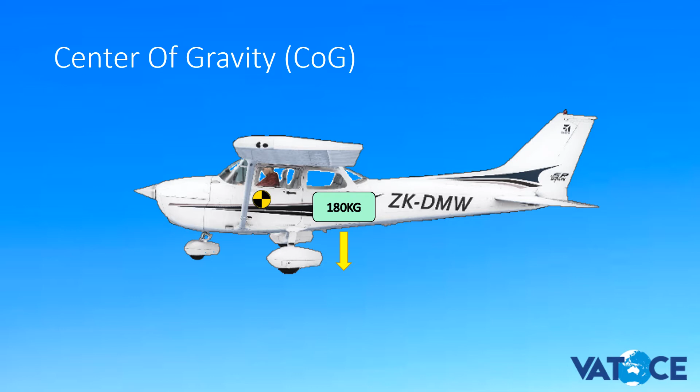So if we're looking now at the center of gravity's effect on the aircraft's stability, we'll see that if we bring up our center of gravity again in the same location, slightly towards the front. Remembering that weight acts through the center of gravity, the whole weight of the aircraft will act through the center of gravity while it's in flight.

Now, we've shown weight, but what we also need to consider is where the lift force is acting. In this case, we'll assume that the lifting force is as where this arrow is showing right now. CL stands for the coefficient of lift, or the center of lift. So this is where the lifting force is acting on the wing and on the aircraft.

Now, if we're looking at this example, basically if you picture the aircraft in flight, it is hanging off the center of lift. The center of lift is what's pulling the aircraft up in the air. So if you can imagine that there's a string connecting through the center of lift to the wing, and you're holding the aircraft and dangling off that string.

Now if you have a look at the center of gravity, you can see that it is forward of this center of lift. So the result of this will mean that because all the weight is acting through the center of gravity, and there's a bit of distance between the center of lift and the weight, the aircraft will tend to nose down, as you can see here.

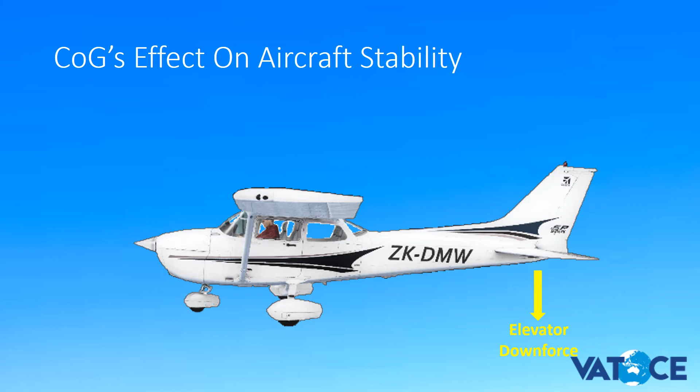Here's our center of gravity now, slightly aft. What would cause the aircraft to have the center of gravity in this position would be potentially some people in the back, or maybe the tanks are full of fuel, and this will cause the center of gravity to move aft.

Now, because weight acts through the center of gravity, roundabout with the center of gravity as it is, it's going to act about the same position as the center of lift in this case. So imagine the center of lift is a string holding the aircraft up, and the weight is acting down through the center of gravity.

Now if the center of lift is a string and you're dangling the aircraft in the air, you'll notice the aircraft will just stay level. It's not going to pitch down, it's not going to pitch up. It'll just stay in the position it's in.

Now, this aircraft is partially stable, but it's not as stable as it was when the center of gravity was ahead of the center of lift. The reason is that when the aircraft comes to stall, it's not going to be as readily wanting to pitch the nose down.

This means we're going to have to generate some downforce on the nose, or some upforce on the back of the plane, to bring the nose down to recover from the stall. Now, in a stall, because the airspeed is very low and the elevator at the back of the plane loses its effectiveness at this lower airspeed, it's going to be a lot harder to bring the nose down. This means it will inherently take longer to recover from the stall, which isn't a good situation, especially if the aircraft is low to the ground, where you really want to recover in as little altitude as you can.

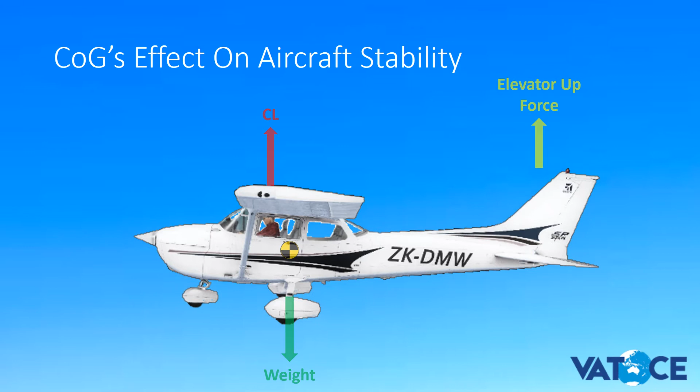When the aircraft stalls, because the elevator loses effectiveness at this lower airspeed, the nose will come up as the aircraft stalls. Now, because we need a nose down attitude to gain airspeed to recover from a stall, with the center of gravity aft of the center of lift, the aircraft is not going to want to nose down.

It's wanting to stay with the nose up because remember that string attached to the center of lift on the wing, and the center of gravity is aft of the center of lift. The aircraft wants to nose up, and because of that really low airspeed in the stall, and the elevator has lost a lot of its effectiveness, it's going to be very hard, if not near impossible, to lower the nose of the aircraft. This will result in the aircraft pancaking into the ground or even entering a flat spin, which is not a good idea at all and is a very dangerous situation.

So from these you can see that the trade-off for stability is speed, and basically you really want to have your center of gravity ahead of your center of lift if at all possible. Otherwise you're endangering the flight and potentially risk crashing the aircraft.

So it really depends. If you're wanting to get more speed but the aircraft being less stable, then it's not a good idea. I mean, depending on the aircraft type, say in the Cessna 172, you may get an extra 10 knots on top of the cruising speed when the center of gravity is further aft.

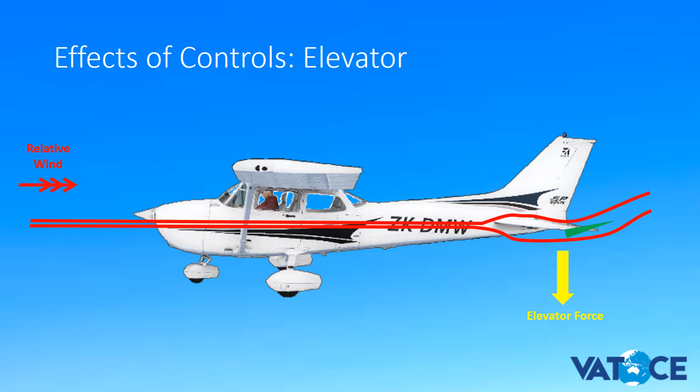Alright, let's move on to the ailerons now. Ailerons are located on the ends of the wing, and what they're used for is to bank the aircraft, or roll the aircraft.

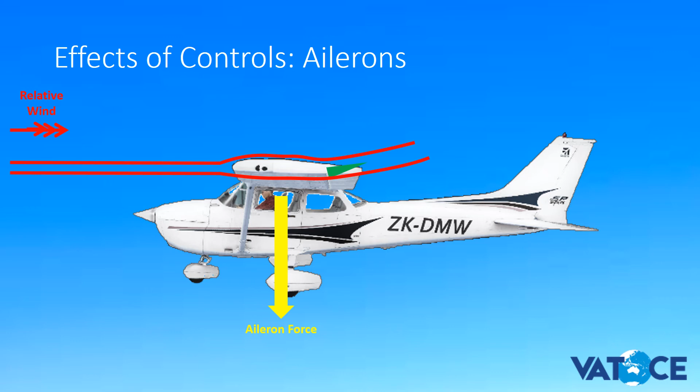This is kind of a weird angle to look at this demonstration from, so I'll show you another angle in a second. Hopefully it makes sense that because the aileron is coming up, it's reducing the amount of lift on that left-hand wing, basically making the wing go down. Let's change to the other angle and show you how this works.

Looking at the back of the plane, we've got our two components of lift on each wing, representing the lifting force on each wing. If we move the control column to the left, you'll notice the left aileron comes up and the right aileron goes down, as you can see here. The left aileron deflects air upwards, while the right aileron deflects air downwards.

As I said before, the aileron on the left wing, as it comes up, deflects air upwards, which decreases the lifting force on the left-hand wing. However, because the aileron on the right-hand wing deflects air downwards, it adds to the lifting force on the right wing, so the lifting force on the right wing will increase.

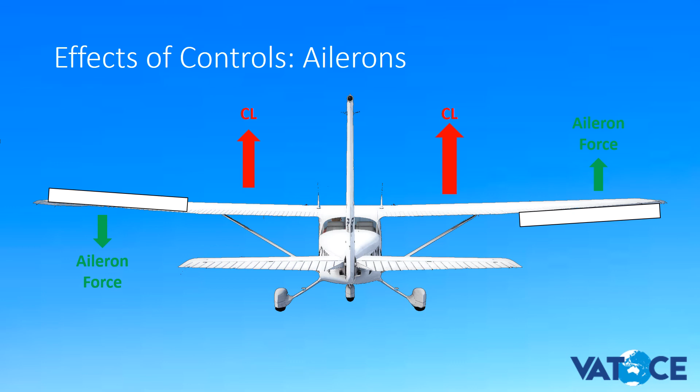So you've got the aileron force, as you can see there. If you add the aileron forces to the components of lift, you'll observe that on the left wing the component of lift will decrease, and on the right wing it will increase. As a result, the right wing wants to climb while the left wing wants to descend, and this causes a rolling effect to the left. You'll note that the aircraft will roll left. This is the basic fundamental of how ailerons work.

The same applies if the aircraft was to turn right: you would move the control column to the right, the ailerons on the right wing would come up, and the ailerons on the left wing would go down. Secondary effects of the aileron include not just the aircraft rolling, but when rolling the aircraft, we also get a secondary effect called yaw.

I'll explain yaw in the next slide, but when the aircraft banks, it skids into the turn. I can't really show this in this diagram, so just bear with me and try to imagine what I'm explaining. The aircraft will roll left, and as it rolls left, it kind of skids left and skids into the turn.

Let me get my pen out. So the aircraft is going to skid this way as it goes into the turn. Now what this is going to cause is the aircraft's nose to, well, not pitch to the right, sorry, but yaw to the right. By yawing to the right, it means it's going to be skidding through the turn, which isn't as efficient.

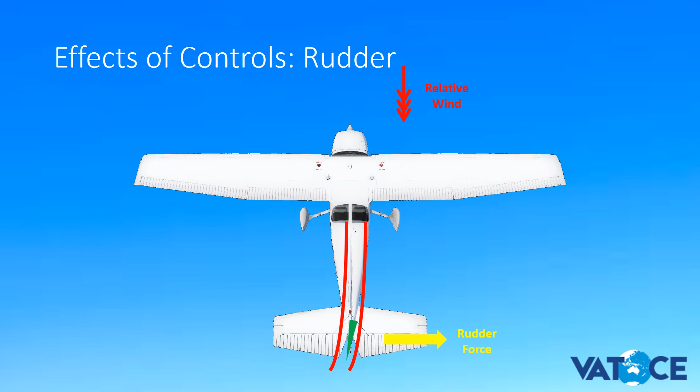This will create a force generated by the rudder to the right, and because of this, the tail of the aircraft will move to the right and the aircraft will move left, which is what we call yaw.

Now, in a turn, the aircraft will skid out of the turn. To keep the aircraft in balance, which I'll explain in another video, we'll add some left rudder in that left-hand turn to keep it balanced around the turn.

Now, rudder also has a secondary effect, or yaw as we call it. When you push the left-hand rudder pedal as in this example, you'll notice the aircraft will obviously yaw to the left, but the secondary effect of yaw is roll.

So as I push left on my rudder pedal, the aircraft will yaw to the left, but it will also, a little bit, not a huge amount, also roll a bit to the left as well. That's the secondary effect of the rudder, or yaw.

So in conclusion, we've covered the four forces of flight, which include lift, thrust, drag, and weight. We've also covered the center of gravity and its effects on the aircraft when it comes to adding loading or weight in different parts of the airplane.